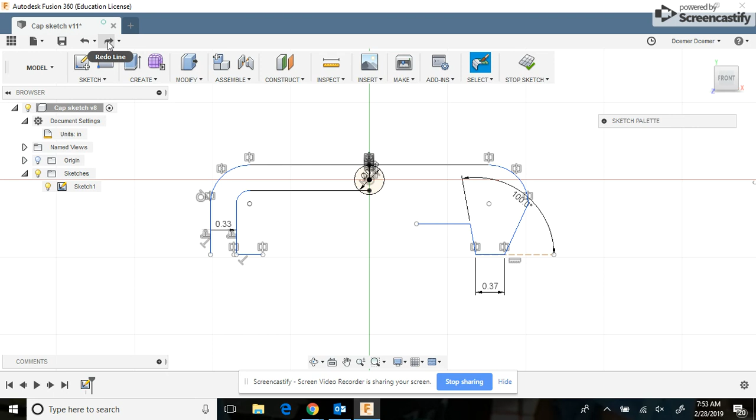I drew a line straight down and then offset it to the new dimension of 0.33. Did a little bit of cleanup to try to get just one point on the bottom in the new location and then connect the dots. I can delete the rest of that line now and draw the new line that's the correct length of 0.42.

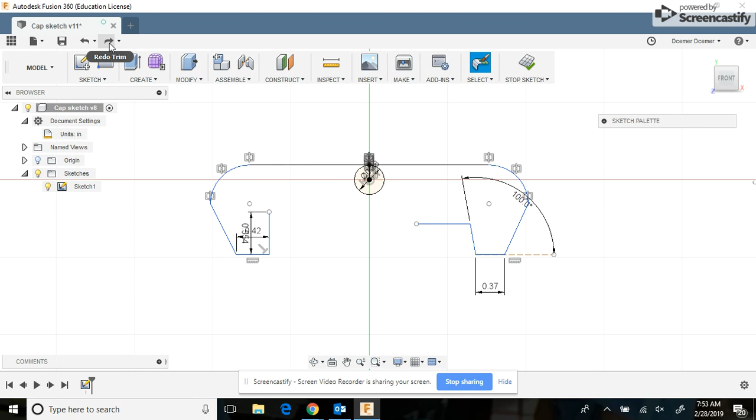After that, I can draw a line to a height that I know is greater than the distance to that horizontal line and just extend it so that they touch. Trim out the excess. I'll also be drawing in a second circle with a diameter of 0.88 according to the dimensions given.

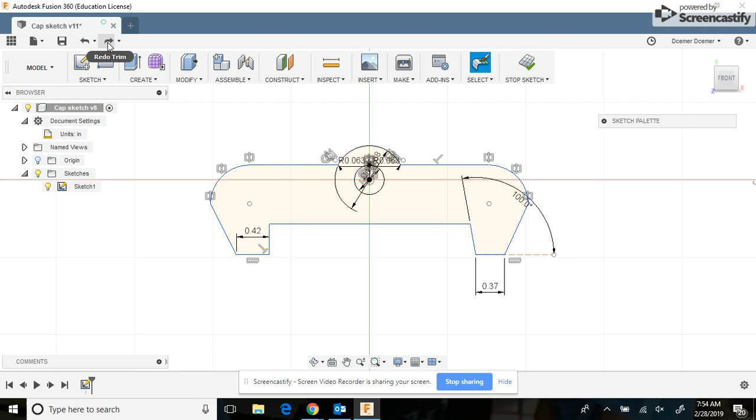I will trim out the excess and add radius to each of those intersecting points of the circle to the top line. At that point in time, I can create an extrusion of 1.5 inches, and I'll start a new sketch on the surface of this extruded body. It's important that I use this surface right here because most of the work will occur in that area.

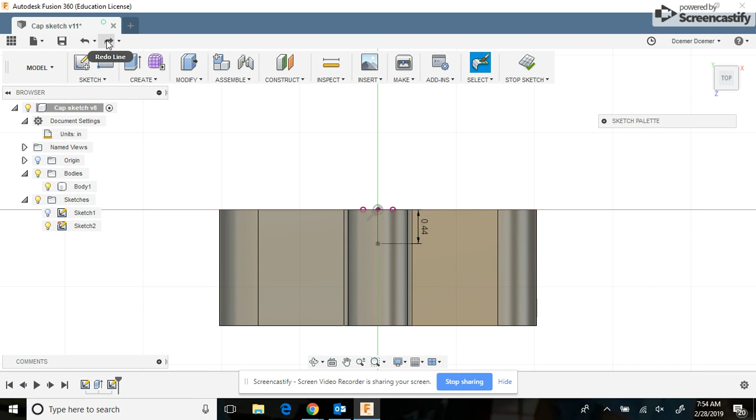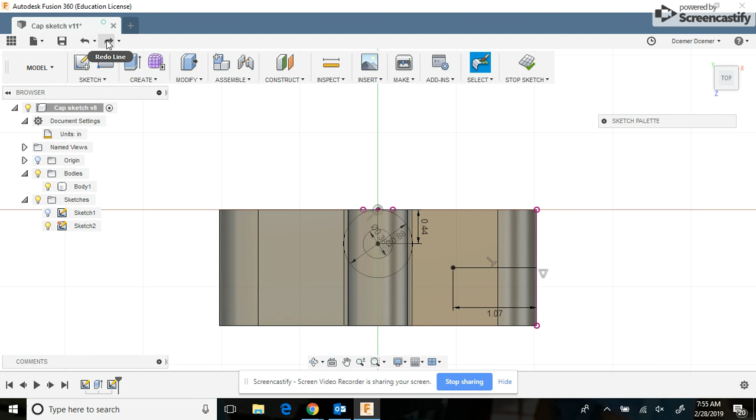Next, I am drawing a line of 0.44 to find the center point of my new circles. Both of them will be concentric with different diameters, 0.88 and 0.38. Next, I am drawing a 1.07 inch line as indicated in the dimensions from the center of the right hand side onto my work plane so that I can locate a new circle of a diameter 0.44.

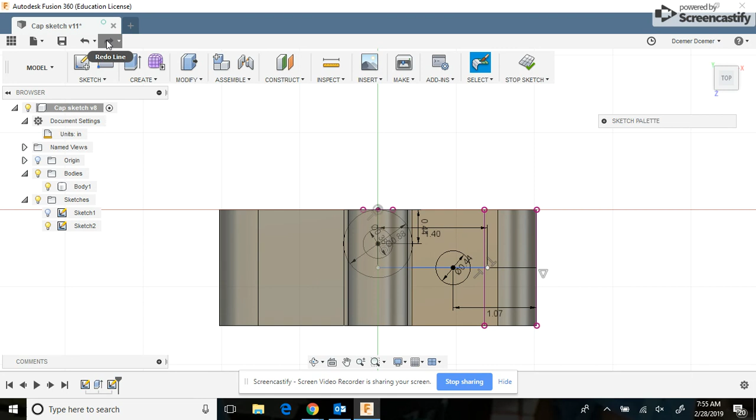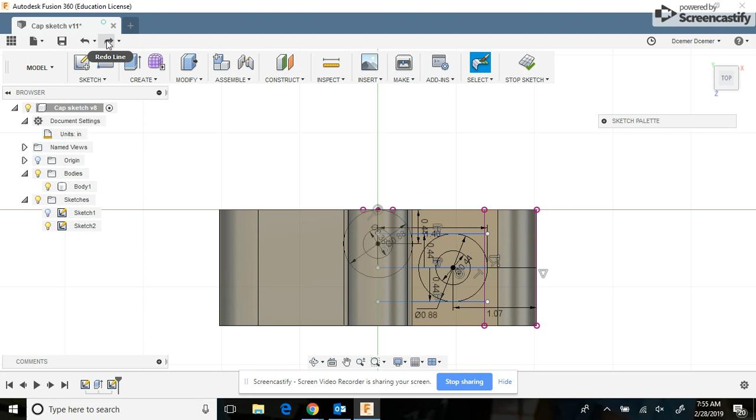I will also create another temporary line of 0.40 so that I can find the diameter of my second circle by snapping to it. It just so happens that that diameter is also 0.88. At this point in time, I'll use that new center line that I created to do offsets in both directions of 0.44 so that I know that they are tangent to the circle. I can trim out the excess.

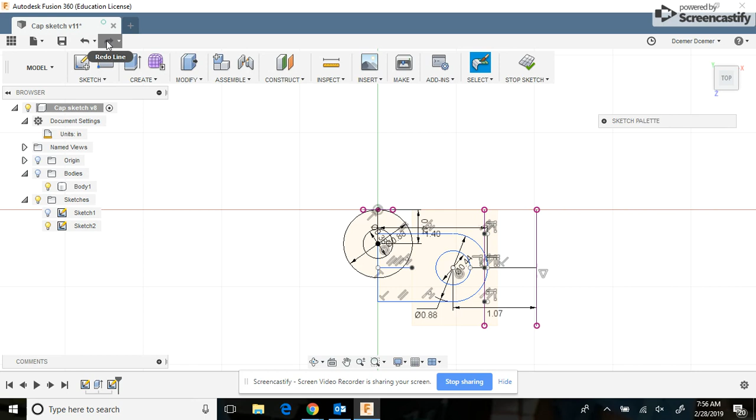As I have shown in previous workflow, I use a lot of construction lines and trim out the excess whenever I am ready to complete my sketch work and perform extrusions. Now that I have good quality and parametrically defined sketches, I know what I am prepared to extrude, so I will begin the extrusion process

based off of the circles that I just created, starting with that one first and then the other one second, extruding both up and down for the hollowed out space and the new bodies, which should be joined. I can complete an assembly that looks like this. Next, it would be ready for the applied fillets.

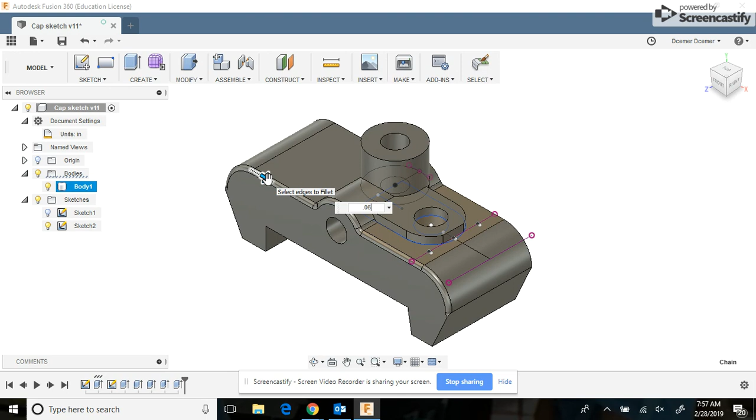And as indicated in the general notes, all of the fillets are going to be either 1/16 or 1/32 in radius. So I am starting with the 1/16 attempt first to see if it fits. Continue on with the rest of your fillets.